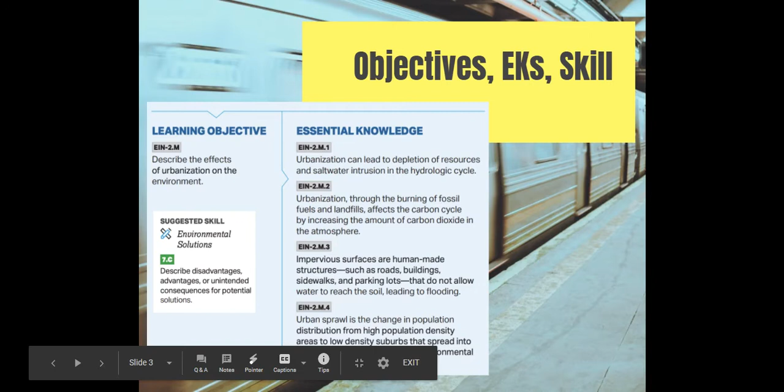Your objectives here are to describe the effects of urbanization on the environment and describe the disadvantages, advantages, or unintended consequences of trying to bring it back to where it was.

So urbanization means removing the vegetation to convert the land to city, which is urban. This means we replace the soil, vegetation, and wetlands with impervious surfaces such as concrete, asphalt, or cement, which means water is not able to go down and infiltrate into the ground.

So for example, here, if you look in the natural setting, 40% of all rain is evaporated back up so it can be recycled. 10% runs off into the streams, and 50% goes down into the groundwater so that it can be used by the trees, go down into the groundwater, and be used.

In cities, 30% goes to evaporation, 55% is runoff, and only 15% makes it down into the groundwater. 55% because the impervious surfaces mean that it is not able to go down into the groundwater. It goes into the sewers, into the streets, elsewhere.

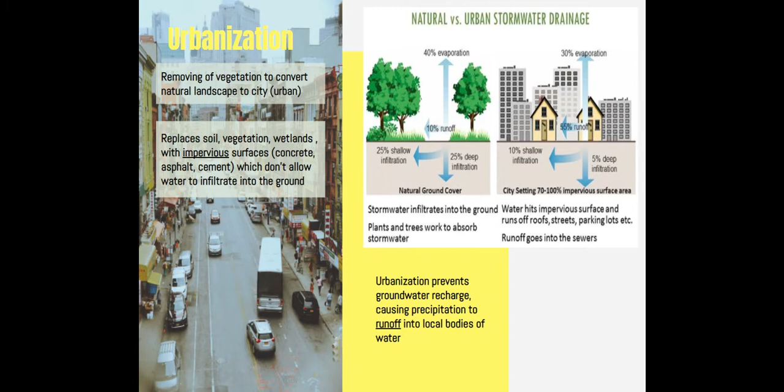Urbanization prevents groundwater recharge, which is very important for cities because that's where we get a lot of our water, and therefore it goes into local bodies of water. It also involves CO2 emissions.

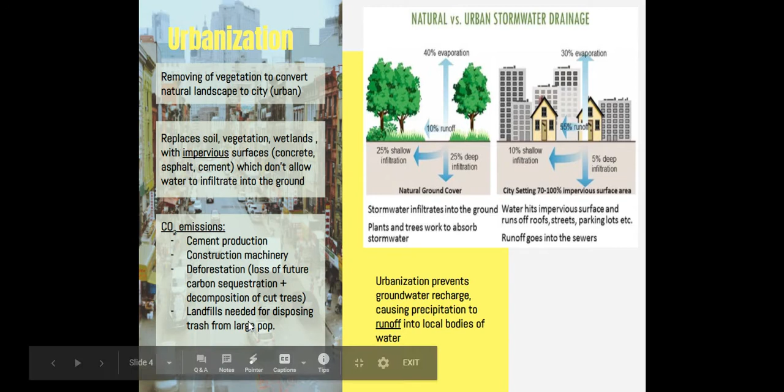Urbanization involves such things as cement production, all the construction machinery, all the cars and trucks, and deforestation leading to the urban area, where we lose the trees, which provide carbon sequestration, and a lot of the trees are decomposed after they're cut down. We also have large areas of landfills, where, as we will learn later on, decomposition happens, and that decomposition is where CO2, methane, and other things come out of them.

Urbanization in coastal areas has other problems. We can get saltwater intrusion, which is because we're sucking up so much water that it goes back. Instead of the groundwater being fresh all the way out to here, we're sucking so much of it out that the salt water comes back into it.

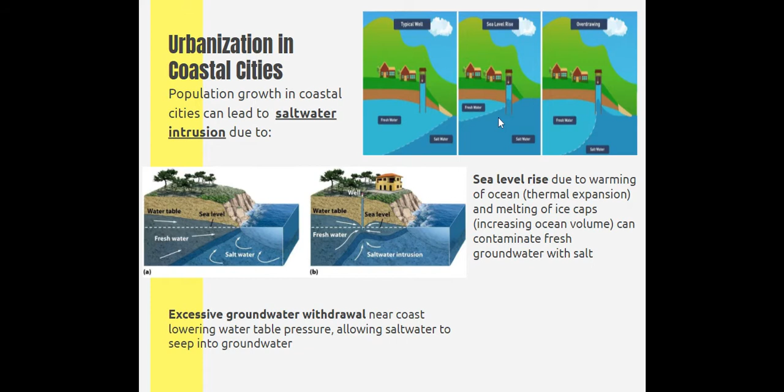Another reason why is global warming, mostly due to thermal expansion from increasing temperatures, but also because of melting of the ice caps. This can lead to it because as the water gets higher, it's eventually going to go into the pipes that go up into the city.

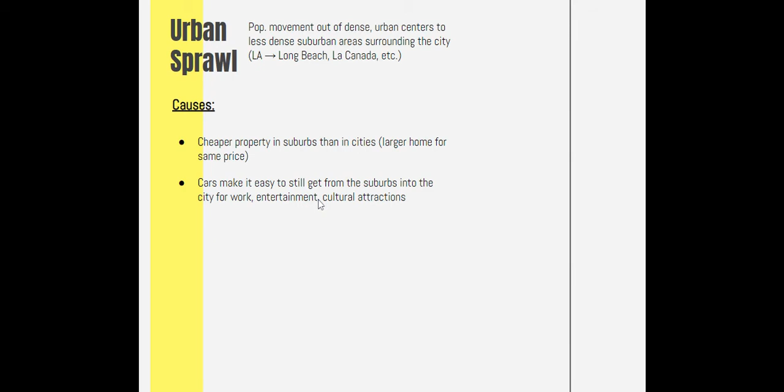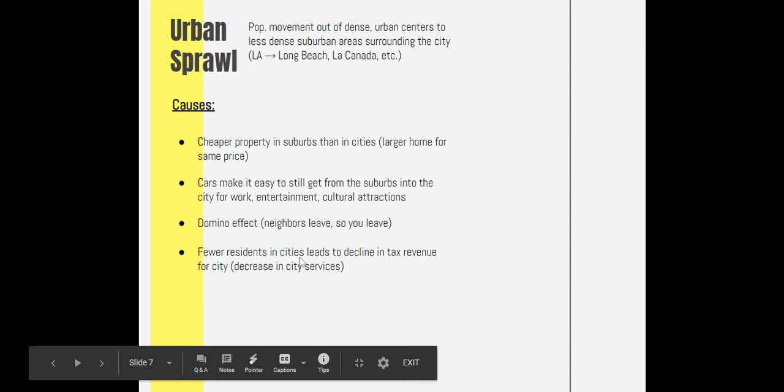Because the people leave, you want to leave also because none of your neighbors are left around. Because there are fewer residents, there's less tax revenue, and therefore there are fewer city services.

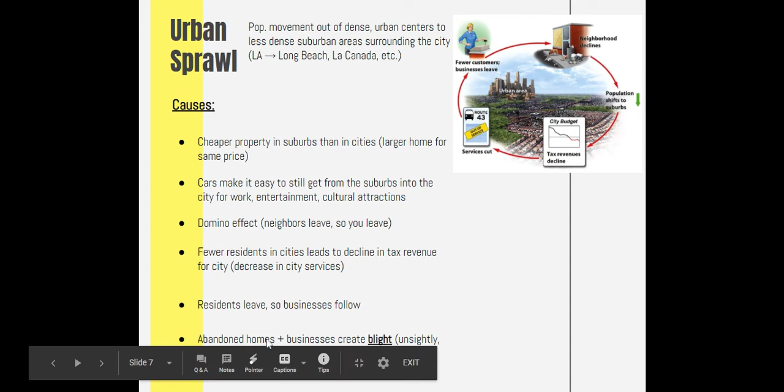Also, because the residents are leaving, businesses follow. A lot of places in ghetto areas, there are no supermarkets. They have no place to get a lot of their food. These abandoned buildings in these areas become unsightly. They become run down, and therefore it becomes uglier and uglier, and therefore more people move.

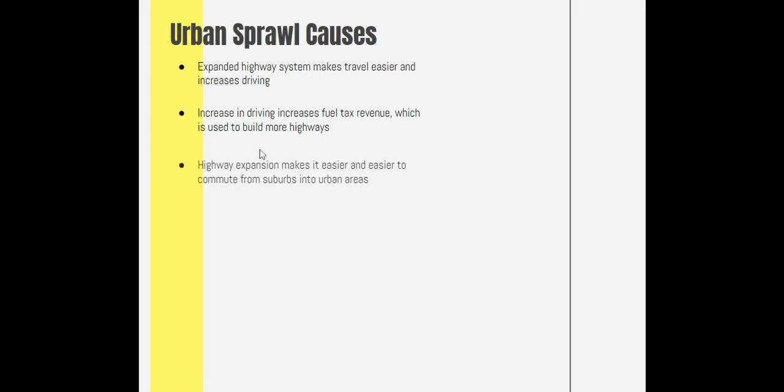One of the causes of urban sprawl is the expanded highway system. When we got the 14 and such, more and more people were moving up to the Santa Clarita and Palmdale area. Increased driving increases fuel tax revenue, which means we can build more highways. Highway expansion makes it easier and easier to commute from the suburbs to urban areas.

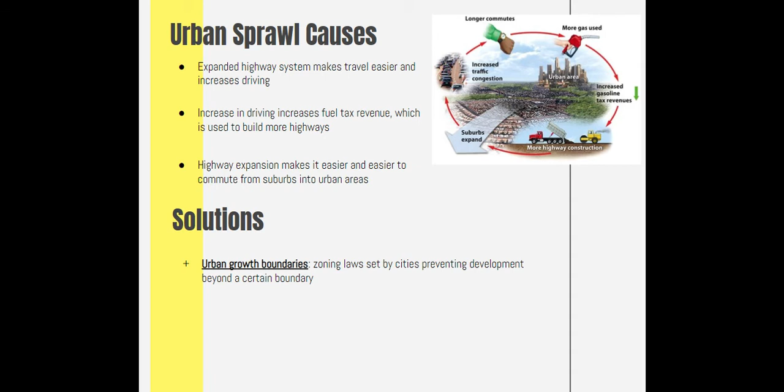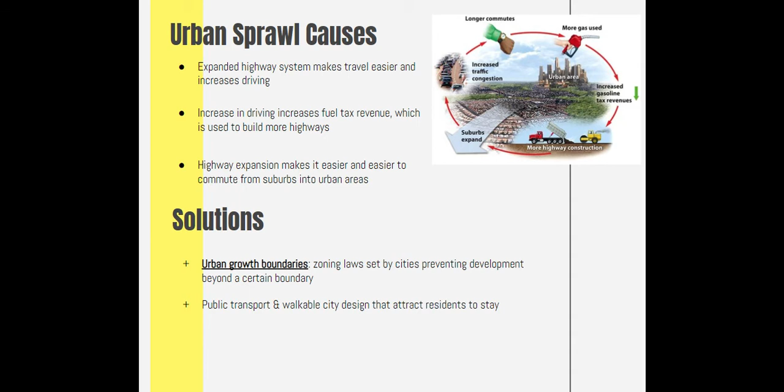Some of the solutions to that: let's make it so you can't go beyond a certain distance. Let's make public transport feasible and make it a city where you can walk or ride your bike. Let's have mixed land use where you have residential, business, entertainment in the same building, all located within the same area.

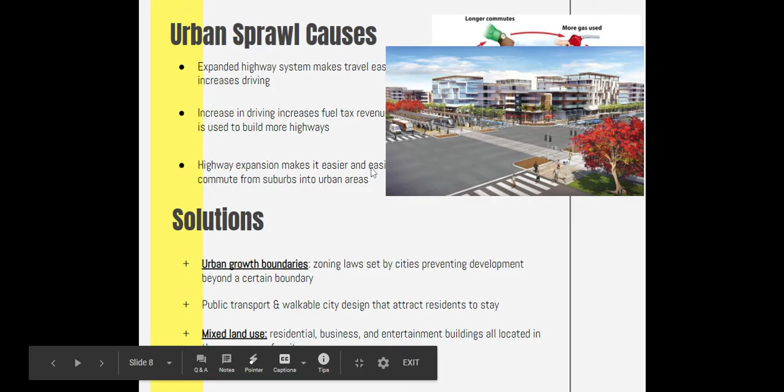So, practice question 5 for this unit. Describe a possible solution to the issue of urban sprawl and identify one of the possible economic consequences of your solution.

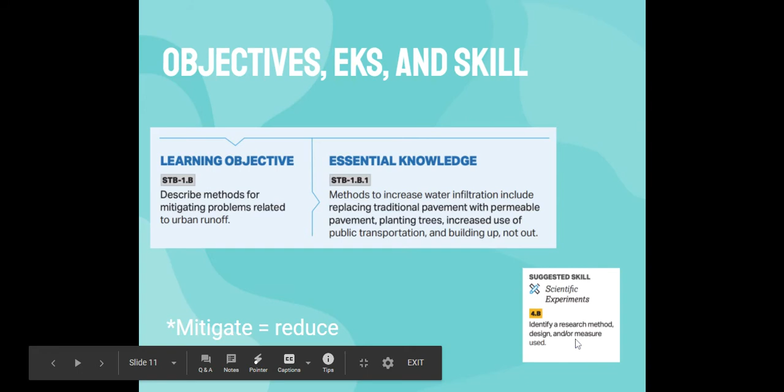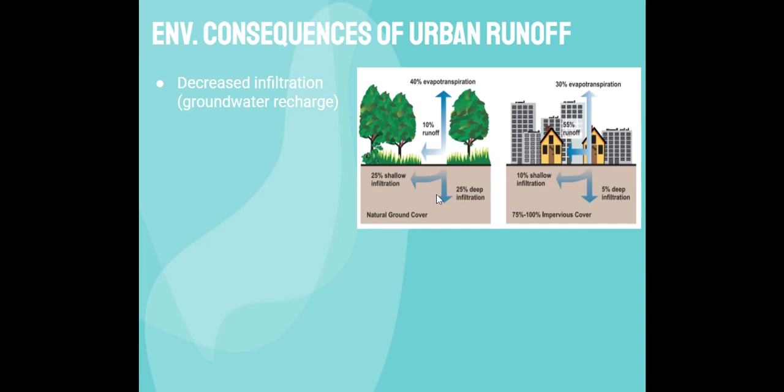Urban runoff. So this learning objective describes the methods of mitigating. Mitigating means reducing problems related to urban runoff. Can you identify a research method, design and measure that method? So what are some of the environmental consequences of urban runoff? There's decreased infiltration, water getting down into the groundwater. And like we said before, only 15% makes it into the groundwater in cities, whereas 50% gets into the groundwater in rural areas.

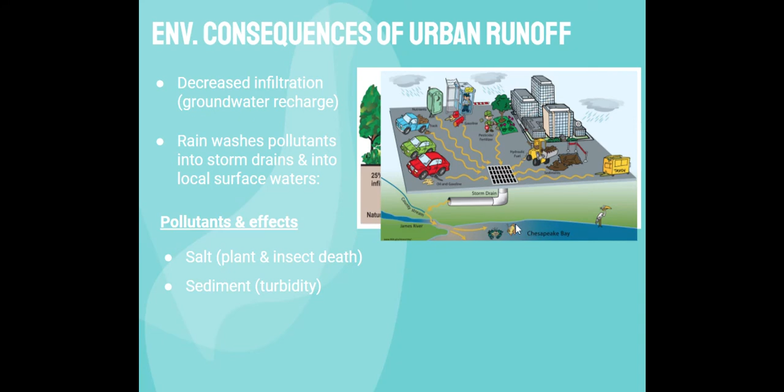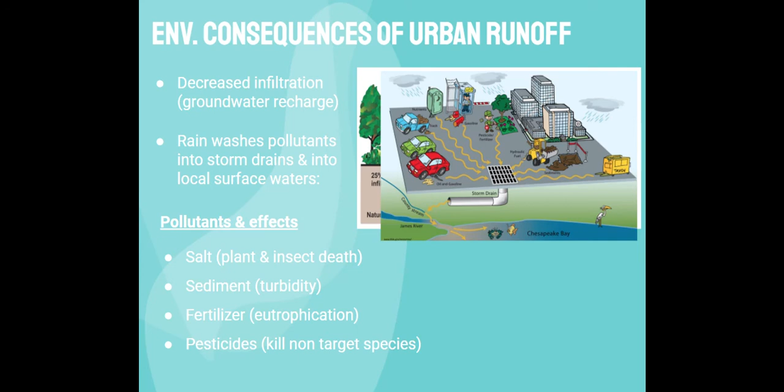Rain washes the pollutants into the storm drains or into the streams. And when that happens, it just goes out and pollutes the area. Pollutants' effects: you've got salt coming off, which can cause plant and insect death. We can have sediment, which causes turbidity. In other words, out where the LA River goes out, there's going to be an area where you can't see very far. You've got fertilizer going out from all the fertilizer we put on our lawns, causing eutrophication. We've got pesticides: let's use that Roundup to get rid of all those plants we don't want, or let's get rid of the insects, and so forth.

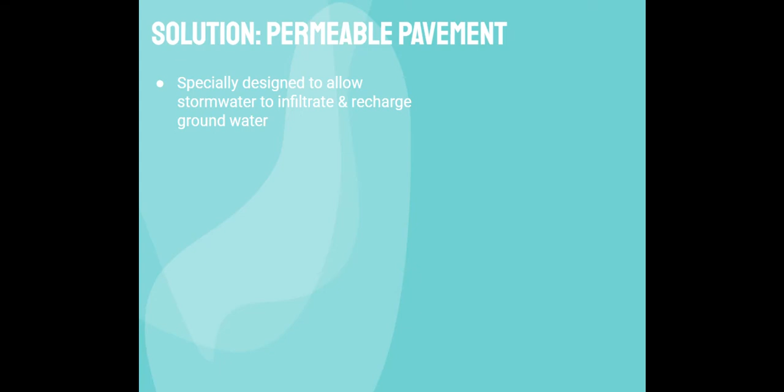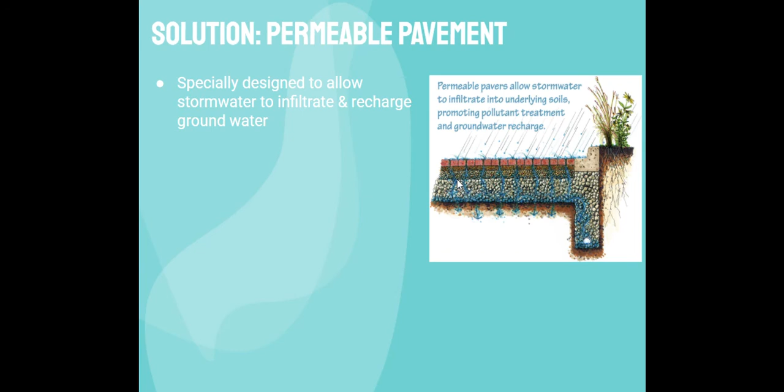A solution to that is to use permeable pavement. These are designed to allow stormwater to go down into the groundwater. Instead of being solid, it has holes down through it, and then it's got bigger and bigger rocks underneath it so that the water can go down into the groundwater. It decreases runoff, decreases pollutants into the streams and storm drains, and decreases the likelihood of flooding in the river.

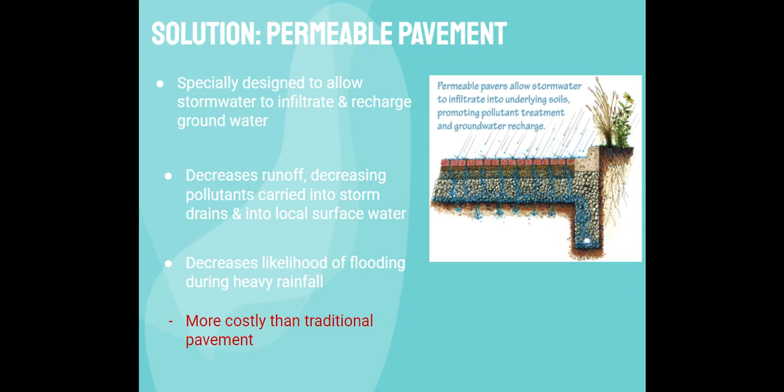When I first moved to LA, it was an El Nino year. And whether you believe it or not, the LA River down by the 5 and the 134 flooded. However, the problem with all this is it's more costly than traditional pavement at this point in time.

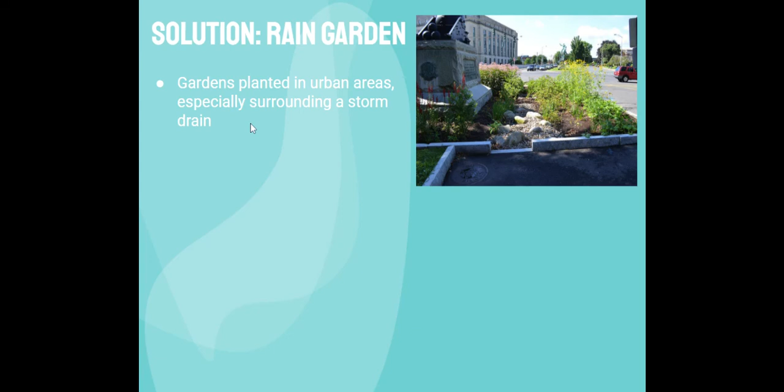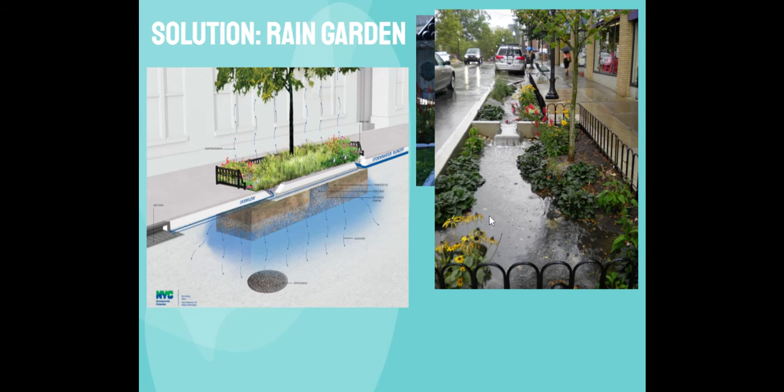Solution: let's have rain gardens. So along the streets in urban areas, let's put a garden right next to the road. It decreases runoff by allowing it to soak into the soil. And it's pretty also. This goes down into the groundwater and creates a habitat for pollinators, and a sense of place.

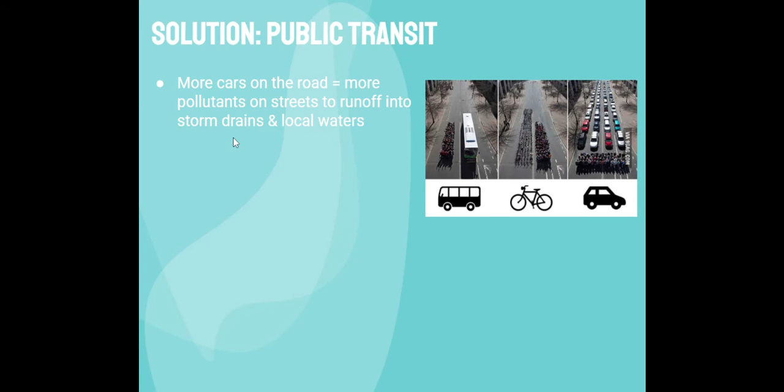Another solution we can use is public transport. The more cars on the road, the more pollutants on the street, and more into the storm drains and local waters, such as motor oil, tire pieces, oh my gosh, gasoline, antifreeze, all these nasties. The more cars, the more lanes and parking lots that are required. In other words, we have to go from a 4-lane to a 5-lane to a 6-lane on each side. When we do that, there's more and more runoff. Public transit reduces the urban runoff, pollutants, and so forth.

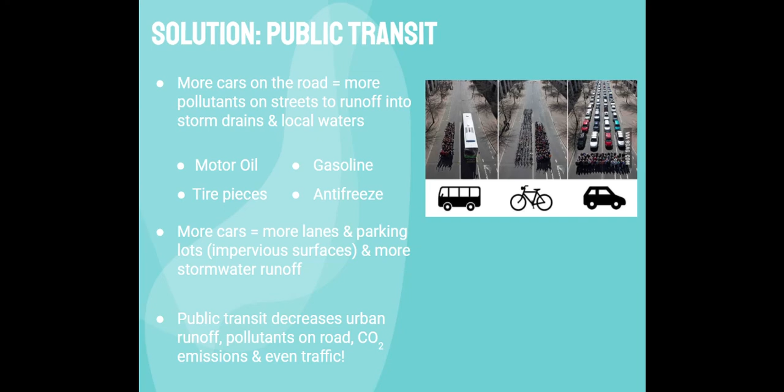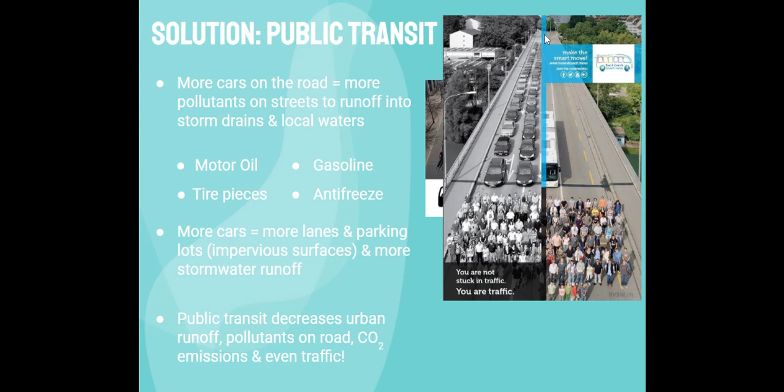If we look here, these are the same number of people. If we got into public transit, we'd have that one vehicle. If we're individuals in cars, and I don't know when's the last time I saw someone during rush hour in the car with someone else, the same number of people would be in that many vehicles. More roads are needed.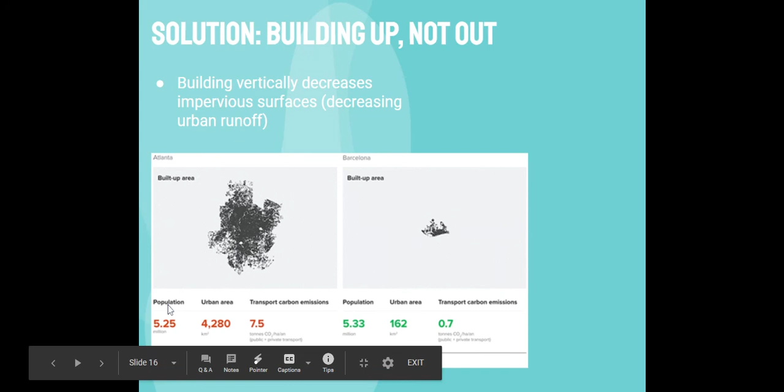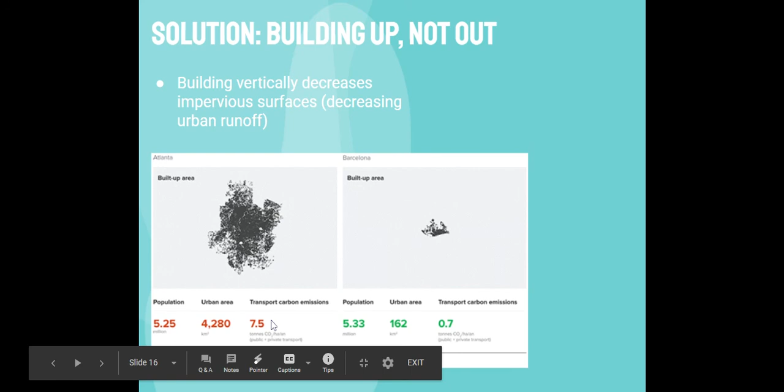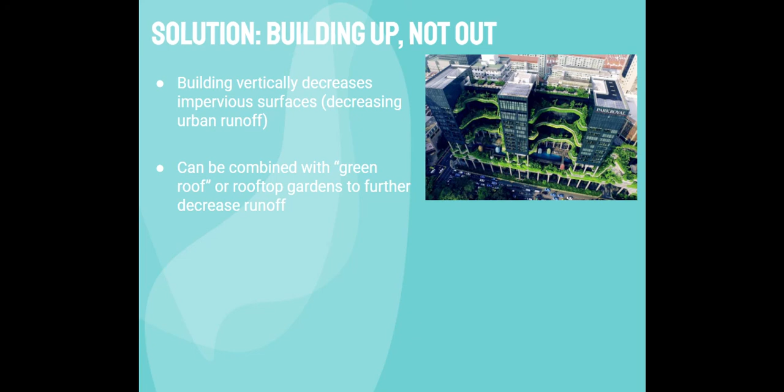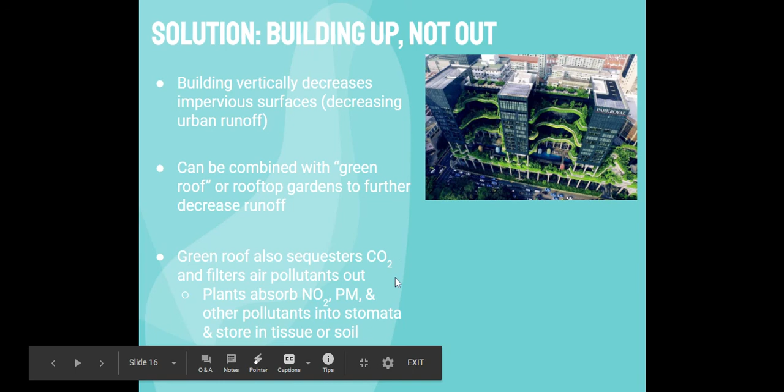Combine that with green roofs or rooftop gardens to further decrease the runoff. Here what you do is basically plant trees all over the place on your roof. It decreases the amount of air conditioning you need, keeps you warmer, decreases the amount of runoff and other problems. It also sequesters CO2. It also sequesters nitrogen dioxide, particulate matter, and other things, because the plant mouths, the stomata, store it in their tissues. And so we get rid of the particulates and all those other things that are really nasty. This is New York City, looking down from one of the high-rises, and we're already getting greening of the roofs in New York City.